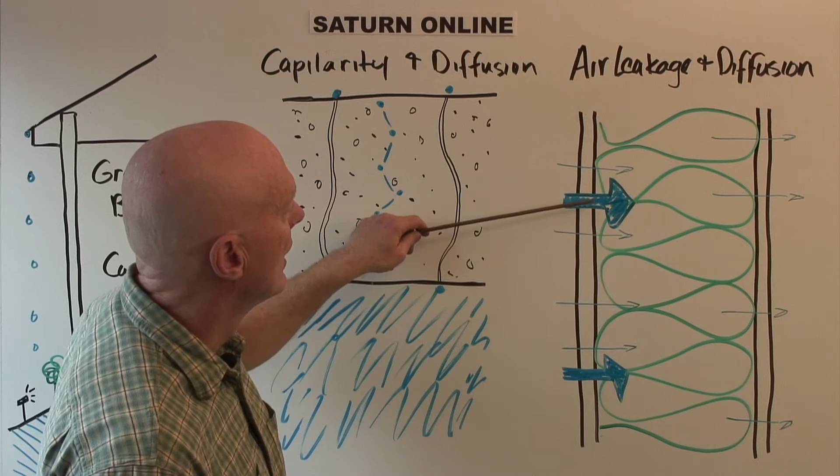An example would be if the house happens to be pressurized because there's a huge return leak, say in the crawl space or something like that. So a lot of outdoor air is being pushed through the furnace and into the house. That would pressurize the house. So that would have a tendency to drive air through the wall cavity. And if that air happened to be moist, then a tremendous amount of moisture could be carried into the wall cavity by this air leakage.

The other way that moisture can be carried into the wall cavity is by vapor diffusion. And this is a much slower process. But again, the water vapor, because the molecules are smaller, can go right through the drywall. It's a slow process, but it can carry a considerable amount of moisture into the wall cavity under a couple of different conditions.

Let's just say we're in Helena, Montana, and the temperature outside is varying between, say, 15 below zero and 0. Well, that outdoor air is extremely dry. Whereas the indoor air may be 50 or 60 or 70% relative humidity. So that creates what we call a large vapor pressure.

Anytime there's a lot of something on one side of an enclosure and not very much on the other, that creates a pressure for whatever it is to move in that direction. So in this case, we're talking about water vapor. If there's a lot of water vapor on this side of the wall and hardly any water vapor on this side of the wall, then the water vapor is going to travel through the materials until it reaches equilibrium.

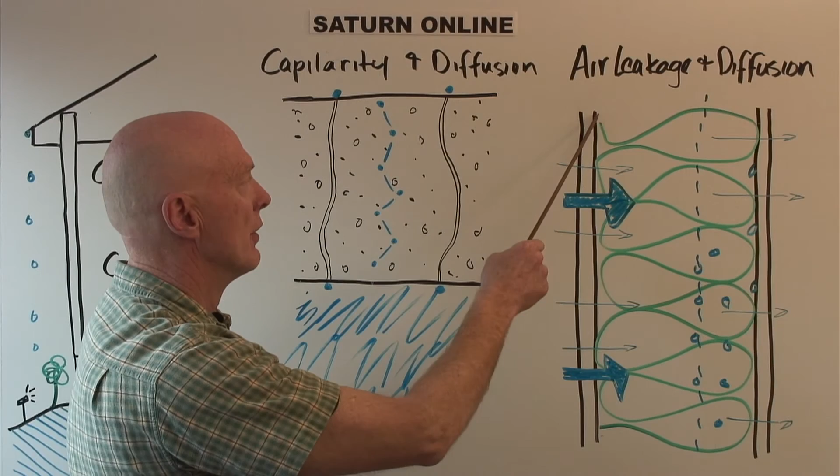We want to stop the air from getting into the wall cavity, because the air is what can take the most water vapor into the cavity. That's what we're really worried about. But in some climates, in the very cold climates, we might also want a vapor barrier to keep the vapor diffusion from happening. And so that's the way that moisture flows through walls.

Now the second way that we might get a flow of moisture through a wall like this where it could be a problem is in a warm climate. Now turn this around in your mind and let's pretend that this is the outdoors and this is the indoors, because we have a cold air-conditioned area in here and a warm humid area out here. Okay, we got a hot humid area here and we have a cool dry area here.

One of the things that air conditioning does is it removes moisture from the air. So we have drier air inside the house than we have outside the house. This is part of delivering comfort, taking the humidity out of the air. So now we have hot, humid air, which is just loaded with water vapor. We have a ton of water vapor here, and not much water vapor here. So again, we've got a vapor pressure.

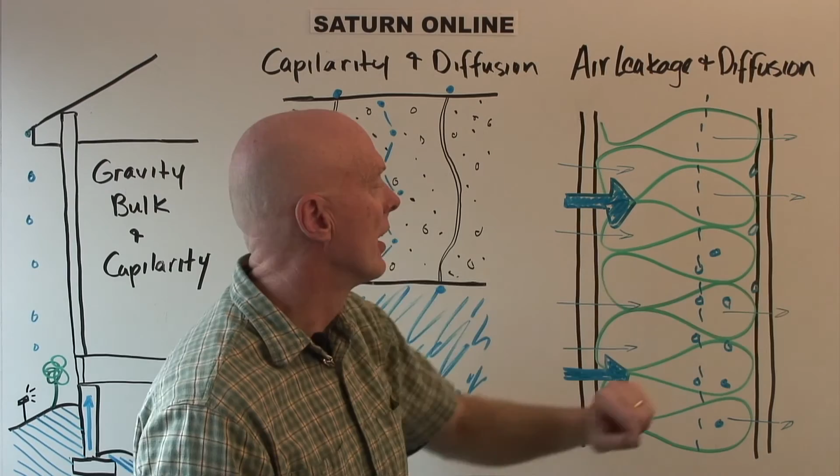And if we had some type of a negative pressure inside, let's say that we had exhaust fans running, or we had the dryer running, or the water heater, which has a chimney which exhausts air out of it, all those things could depressurize the home, which is now over here. And it could cause a movement of air. That warm, moist air could actually get into the wall cavity from outdoors. And so, in moving through here, again, it could find its dew point.

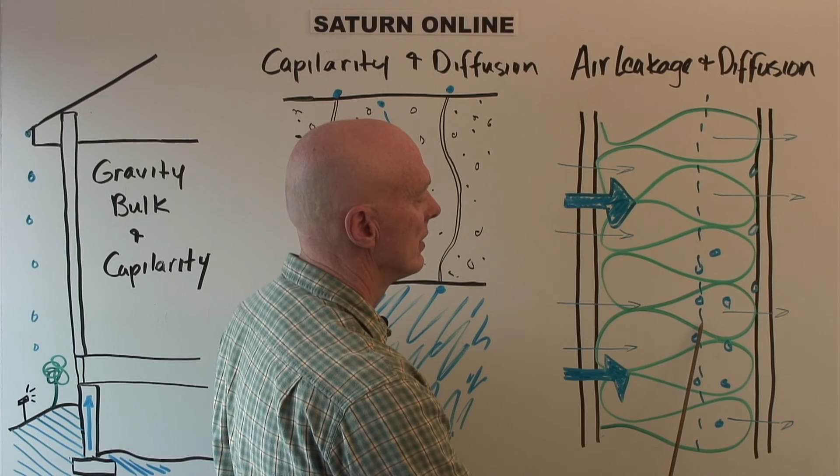Let's say that the temperature is 95 degrees out here, and it's 75 degrees here. So somewhere in between, we may get to a dew point of, say, 80 degrees right here. Well, 80 degrees may be the dew point of that air, meaning that if you have a really hot, humid day, and all of a sudden you cooled that air off, let's say some cold front came in, well, it would probably start raining in that case.

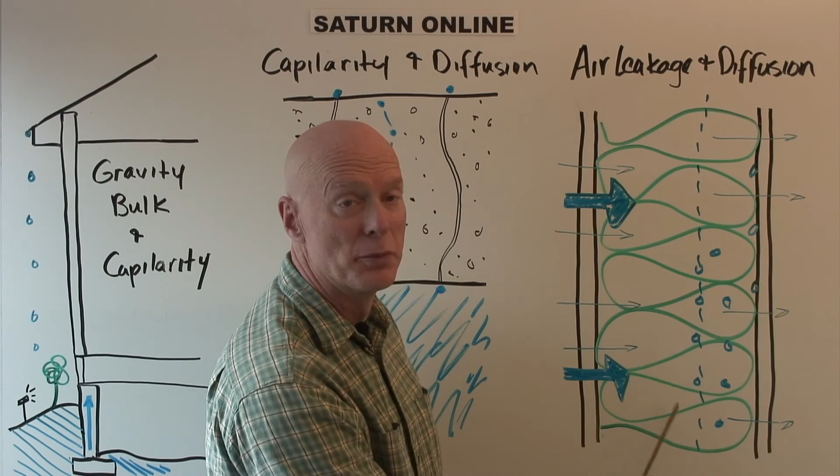So that's what happens. Actually, inside this wall cavity, there's kind of weather going on in here. There's some warm air that's coming through here, and it's meeting a cold front right here. And there's some rain happening inside the wall. Vapor could also diffuse through the wall. So the vapor from the outdoors could diffuse through the wall, add to the amount of water vapor in here, which could create a lot of condensation.

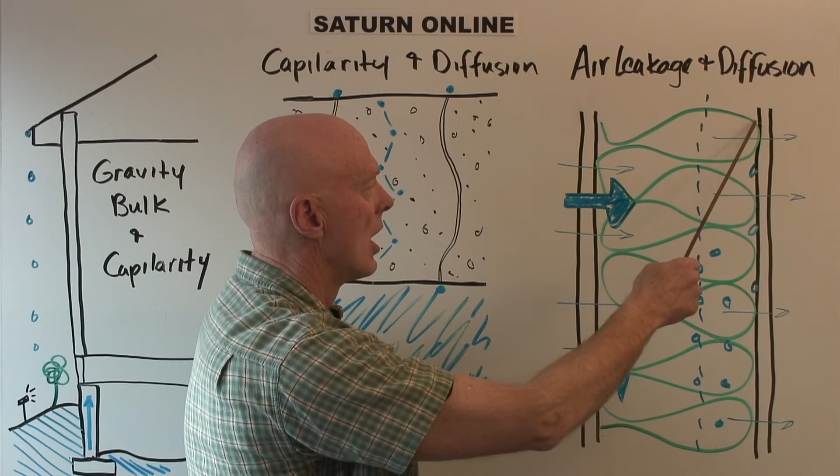The condensation could occur right on the back of the drywall here. It could wet the drywall. When the drywall gets wetted, it can grow mold. It loses some of its structural strength. It's not something that we want to happen. So the two things that we're worried about happen mostly in the more severe climates, the hot, humid climates and the cold, dry climates. And again, water vapor is not our enemy.

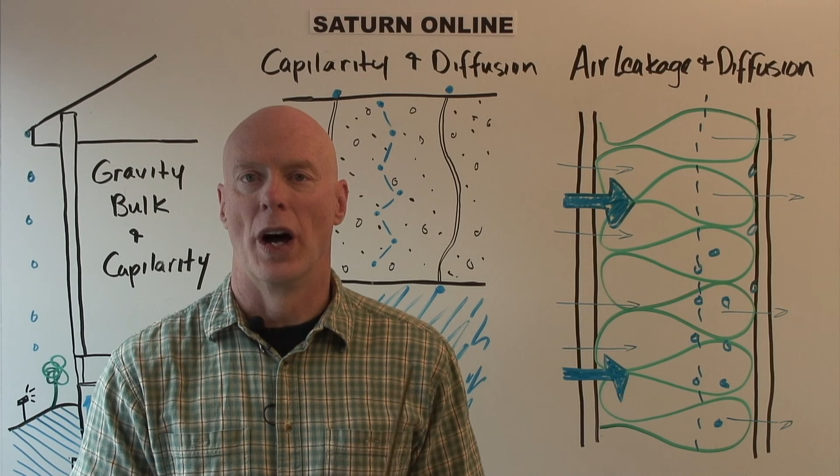What is our enemy is liquid water, because liquid water wets building materials. And when it wets drywall, the drywall is softened and it loses a lot of its structural strength. When masonry materials are wet, the wetness sometimes carries some of the Portland cement and chemicals out of the material. And water can also cause rusting in steel, and it causes rot in wood. Water can do all kinds of mischief.

Water vapor isn't such a problem, but when it condenses, it hurts buildings, and that's what we want to be concerned about, and that's why we want to know about how moisture flows through a building.